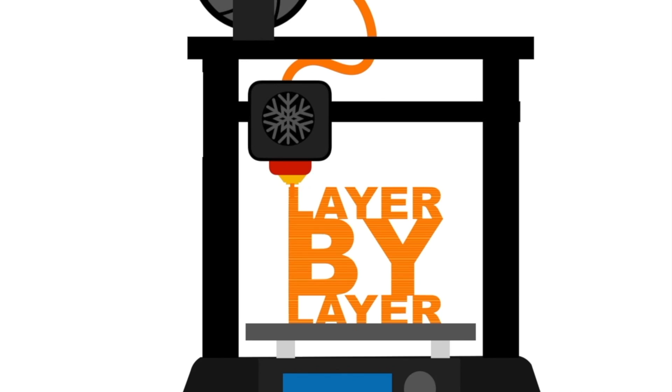Hey folks, welcome back to the channel. While working on the passenger car, I was going through Thingiverse and saw a model for an Ender 3 Pro printer scaled down to fit the size of a spool holder. I thought this was a great, adorable idea and an easy way to dispense the filament, or to dispense the solder while wiring the LEDs to the car.

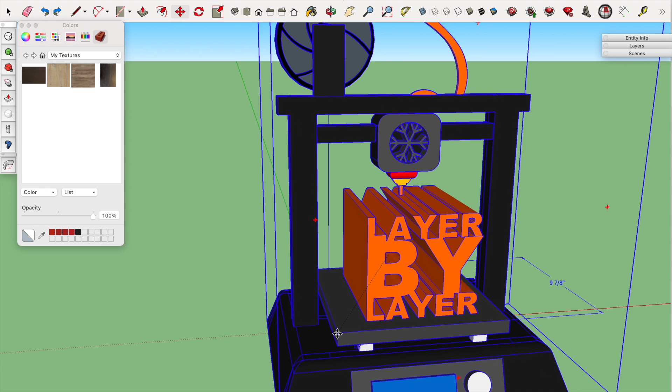But I instantly thought I could redesign it to look like my logo. Luckily, I already had a full 3D model of it that I made as a reference point for my music video, the animation I made previously for the Jazza animation contest. And that's what I did. I imported just the print bed into SketchUp and scaled down my whole model to fit that.

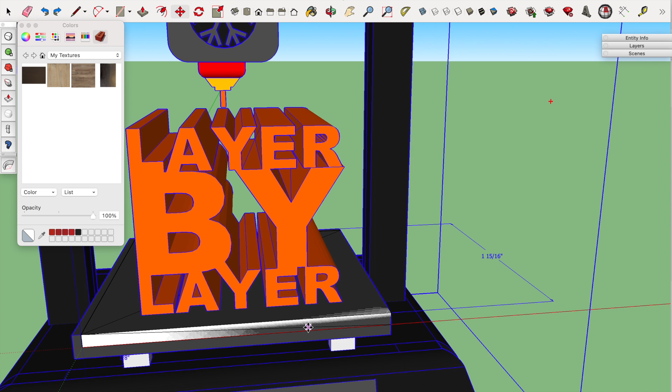I then started to remove all the pieces that I didn't need and fill in the holes that left. And then I separated all the pieces into their own separate parts that I needed to 3D print.

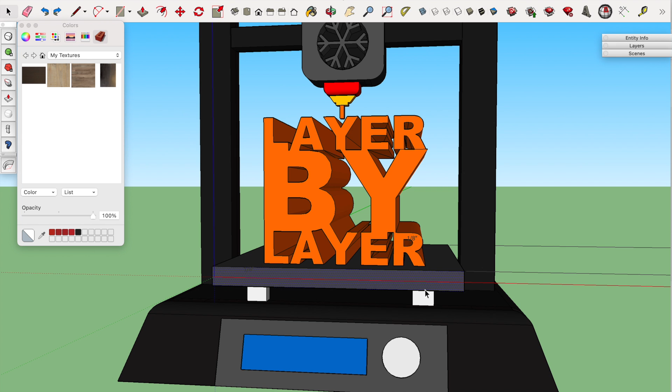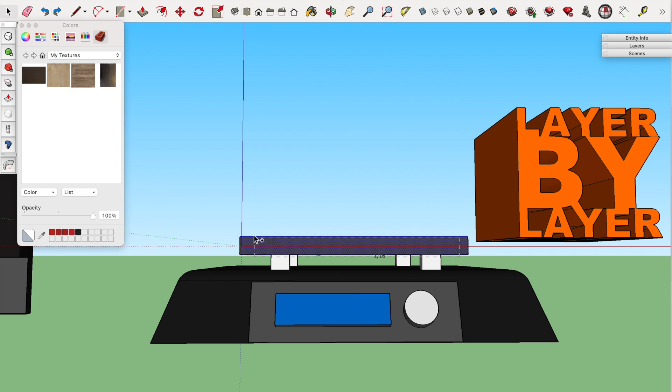The next thing I did was work on the print bed and the springs. So I made sure I was in front facing view and selected the print bed and all the springs and made it into a group so I didn't damage the model. Then I took it to the side and fixed the springs, because originally when I made this model I made it a little more blocky than it should have been, since it didn't have to be 100% accurate.

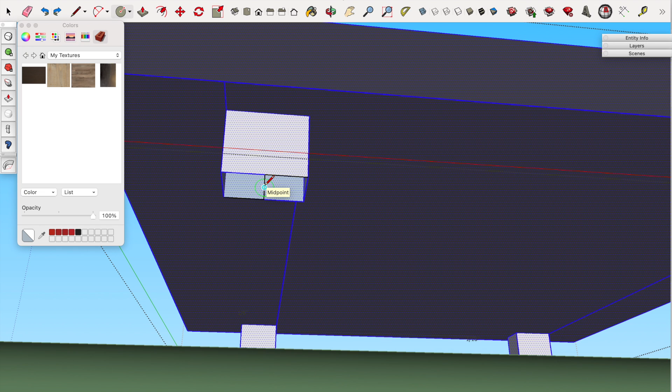I was only doing it for visualization purposes for my Jazza PowerPoint video. I needed a reference to make part of the video. So I wanted to make the springs circular as opposed to square.

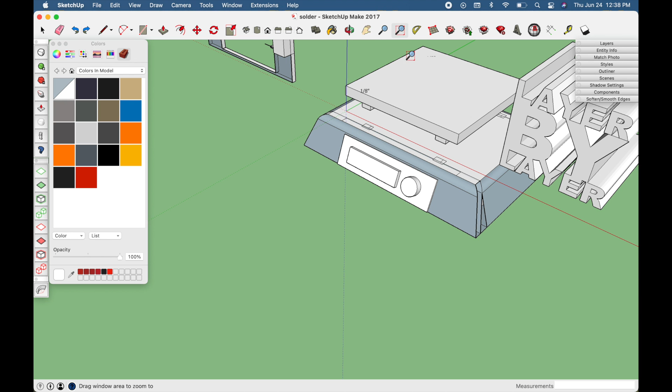So what I did was make a line in the square and make a circle the same diameter as the square, then extruded that and did it on all four sides. Then the next thing I did was go into monochromatic view, so it shows me only two colors, indicating what's an internal face and what's an external face. All the internal faces show up in blue and all the external faces show up in white.

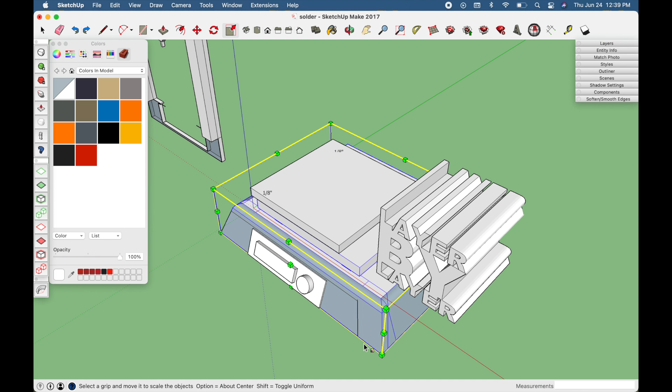While working on that, I noticed there were some holes I wasn't able to fix. So I went to the original model of the print bed and copied and pasted it in. I must have deleted something by accident and it wouldn't let me add it back in. So I just worked with the original base of the unit, which had no issues.

Then I flipped all the faces.

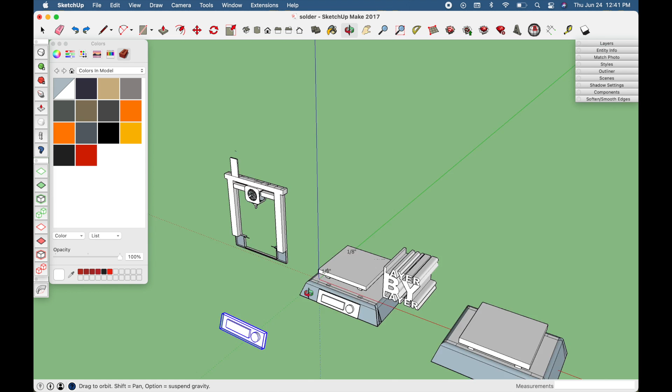While working on the base of the model, I noticed that the LCD screen knob and the hotend were not connected to the model properly. So I took it off the model, made it a group, laid it flat again, and then angled it to the face of the model so it's properly attached so I could 3D print it.

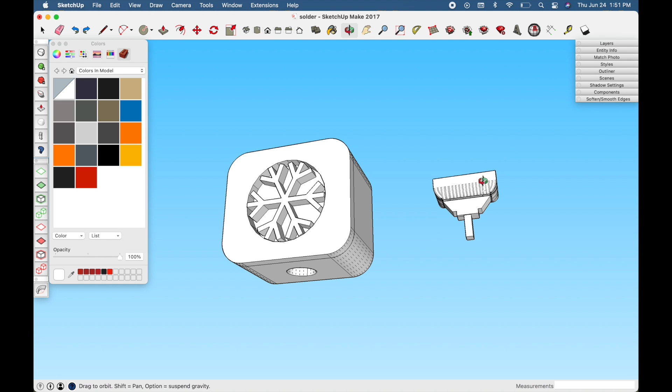Then I started to work on the hotend. The original base unit for the hotend was pretty much the way I wanted it, so I didn't have to do much there except add some holes. Then I wanted to work on the silicone sock and the nozzle.

The problem was that when I first made this, I didn't make any of it accurate to what I really wanted it to be, so I had to start remaking it.

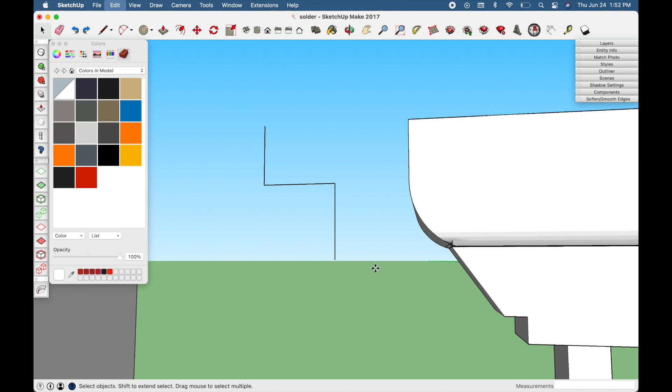I made the rough shape I wanted for the side profile of the silicone sock, then made a square the width that I wanted, and used the follow-me tool to follow it around that. But for some reason it wasn't working on a small scale, so I had to make it larger and then scale it back down.

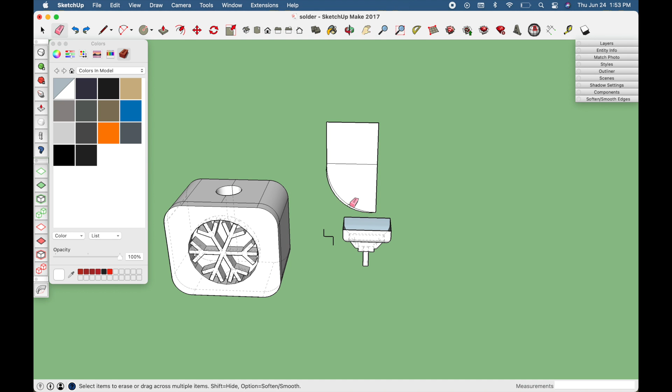And I enclosed it all on the top and the bottom, and added holes to the proper size on the top and bottom of the silicone sock.

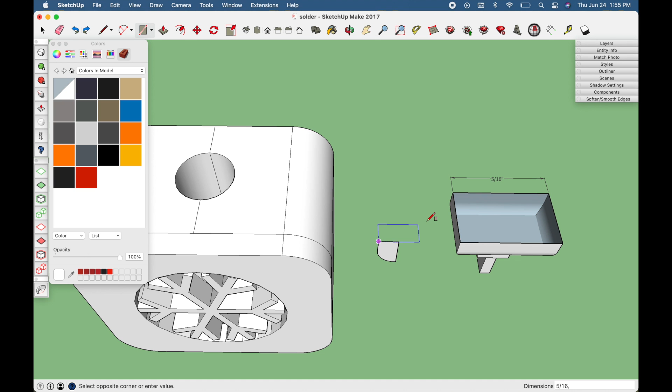Then the next thing I worked on was the nozzle. I made it square like the original design, and added a circle in the center, a little bigger than the diameter of a spool, for the solder wire. And I made the top hole for the hotend a size a little bigger than a piece of Bowden tube, the tube that connects the hotend to the extruder gear, at least on my printer. Not all printers use a Bowden tube.

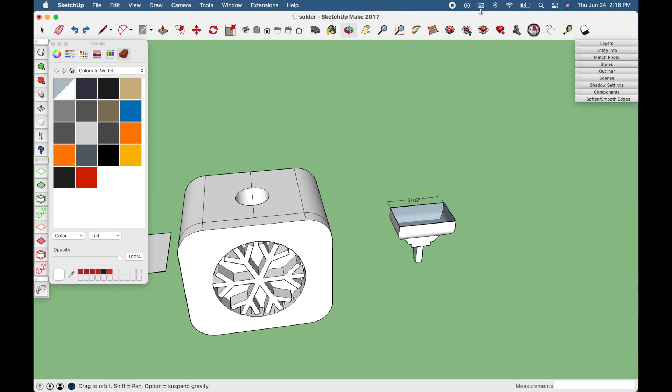Then I decided I wanted to add a magnet to the bottom of the build plate. So in the center I made a rectangle so I could fit a little chunk of sticker paper magnet I have for my cutting machine. I was able to do that, and I'm eventually going to print little objects.

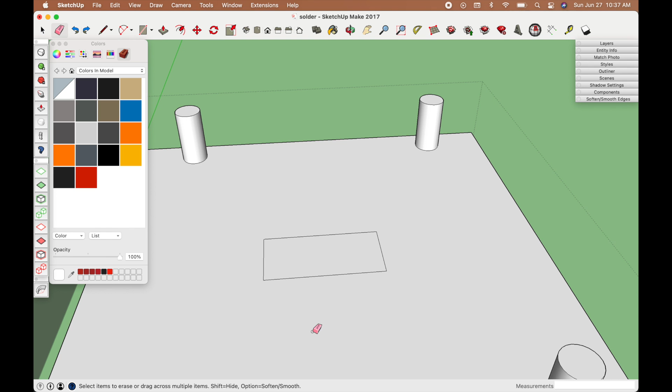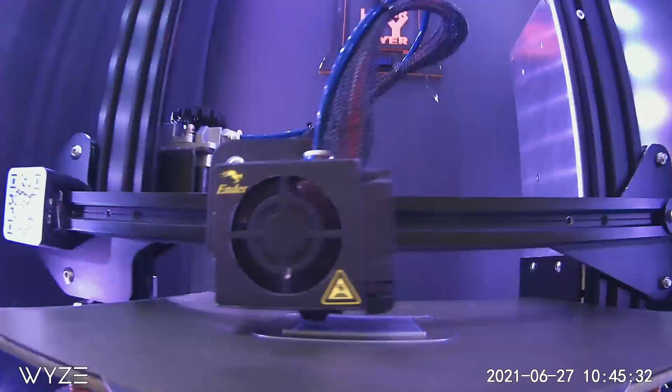Here's the first part being printed. It's the build plate for the printer. I had told Cura to put in a color change, but for some reason it didn't do it. I wanted the springs to be orange, and I wanted it to stop right when the springs started to print. For some reason it didn't, even though I had it at the right layer height.

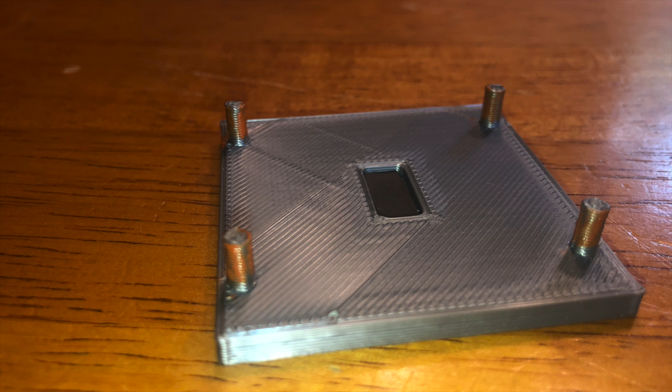I don't know why, but as you can see, I forgot it on the next print, and it started to do it at the right layer height when printing the Z-axis. So I painted the springs orange because that's what I wanted, the springs to be orange.

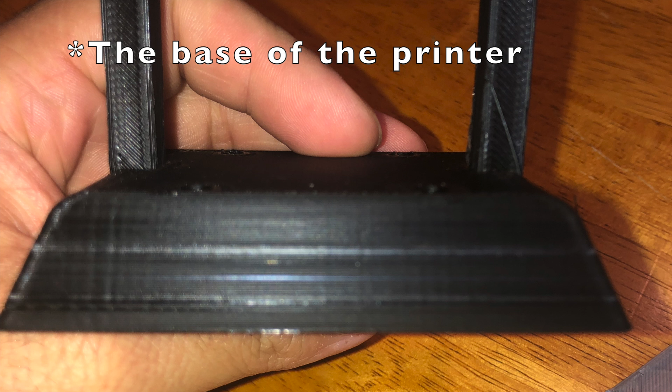Then I printed the build plate and the hot end, but for some reason the footage never saved. I printed both of them with my palette, a 3D printing accessory that lets you print in multiple colors. Mine can only print in 4 colors, where the latest one can print in up to 8 colors.

I printed the base. For some reason it added a slight silver edge on a few layers of the print. I don't know why, and I don't have pictures of it. I painted over it. I thought you'd be able to see it in the video, but the video never captured it.

And I painted the fan silver. Then I started to print my logo, but as you can see, it ripped off the bed along with the raft.

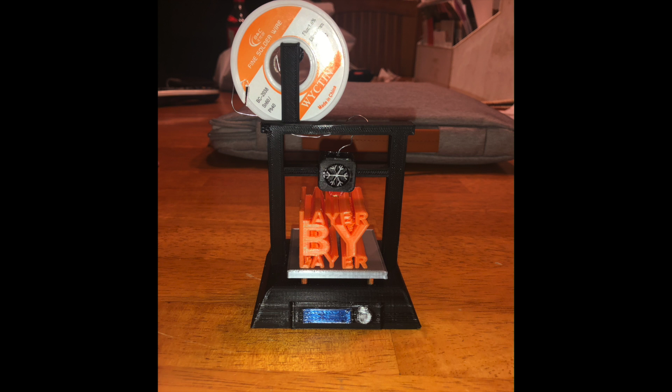Here's a look at the finished model. Stay tuned for part 4 of my passenger car build, where I use this stand and wire up the LEDs to the passenger car that I am building.